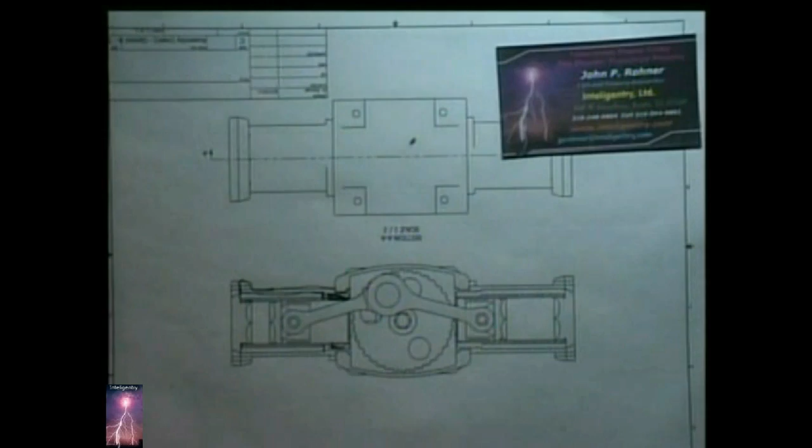Okay. Now, in 1982 - I go through the history of the Papp engine, but just between you, me, and the wall, it's really boring, and it's all convoluted with strange people and other people that have scammed and all kinds of shit. So it's really not worth the conversation.

In 2007, I designed the controller that was programmed by my brother and his technician, which made Papp's 1982 engine run. We've got video of that engine running. That's the same engine that got certified at the University of Western Oklahoma.

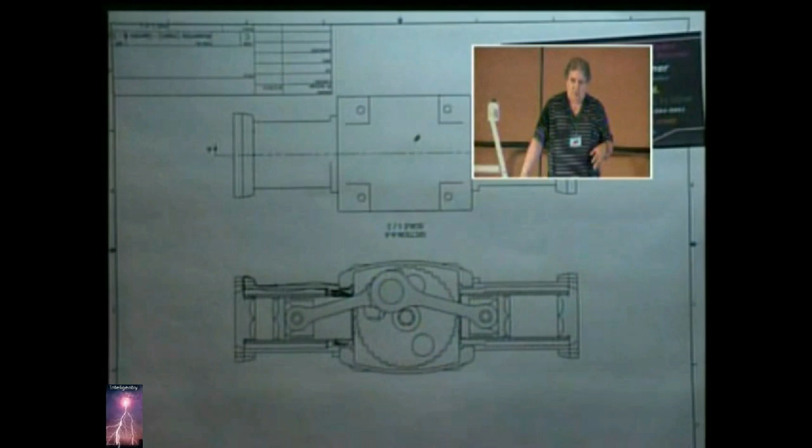Now, that's nice, but just between you and I, it doesn't mean anything, because this engine ran, then they sent it down to Oklahoma, and the professors at Oklahoma couldn't get it started until Joe Papp flew to Oklahoma and made it run for them.

And in my view, I've spent my life developing new products for companies. New products for companies mean that you have to have something you can replicate and the company can sell and make money. And in my view, the simple fact that Papp had to go to Oklahoma to make the engine run means that it was not that. It was not something that anyone could make.

As a matter of fact, in the last 30 years, that particular engine and any copies of it still haven't run. So that gives you some idea what can happen if you see something that's just simply a test and a one-man, one-off thing. And of course, we are trying to make sure we don't do that.

When I discovered the process of how this engine worked, I actually had some of my friends check it, and it was kind of funny because I sent these things to my friends in the nuclear business, and they sent me back a letter saying, oh, look, don't play with the Papp thing, it's a scam. But I sent them back letters saying, look, okay, I think this is how it works. Can you look at it?

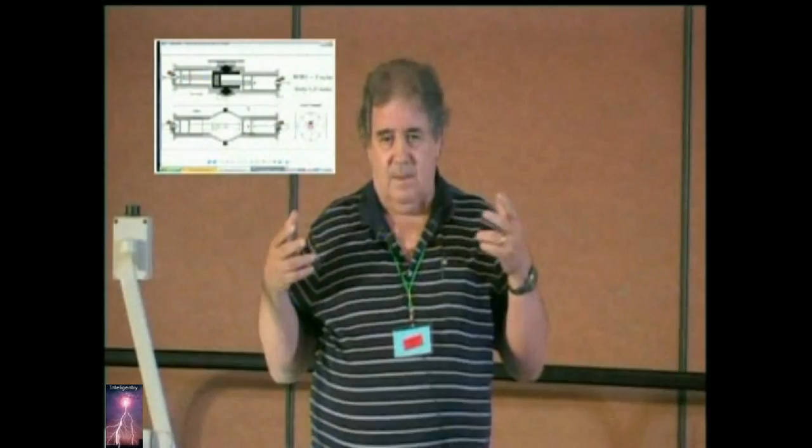Well, basically we do the same thing. The pressure in the cylinder, or in the closed chamber itself, is one atmosphere, and that particular gas now is static at that point. What we do is we ionize or invigorate the gas up to a point where it wants to be something else, in this case a plasma. And then we apply the key element, which is an activation, a ball lightning kind of activation, which then creates or coerces the gas to change from a gas to a plasma. And that expands, fills up the chamber, and the piston moves, just like the steam engine did. And then once it gets to a certain point, we turn it off, and it collapses, just like the steam engine does when the steam turns back into water.

Now, that's the easiest possible way to understand how this works. It's simply an expansion. We're all used to our internal combustion engines, and internal combustion engines work off of an explosion.

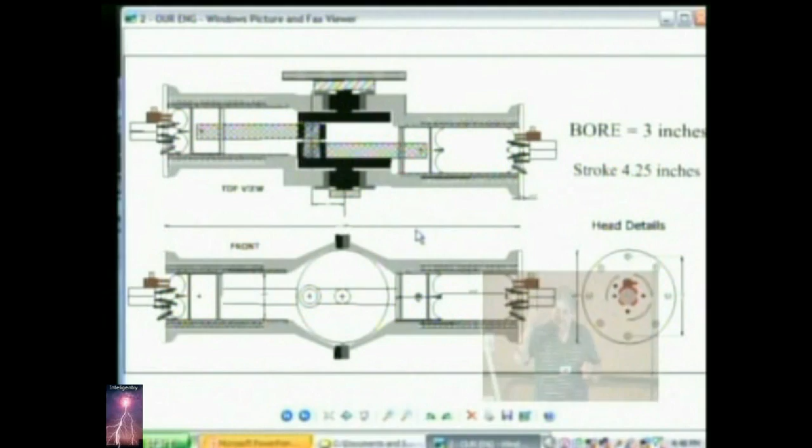That means that when the spark plug goes off, there's an explosion that releases a lot of energy for a very short time, which drives the piston down, and the remainder of the cycle is handled by kinetic energy stored in the flywheel.

Well, in this case, it's like blowing up a balloon and letting the air out. This works by way of expansion. There's no explosion in this cylinder, simply an expansion.

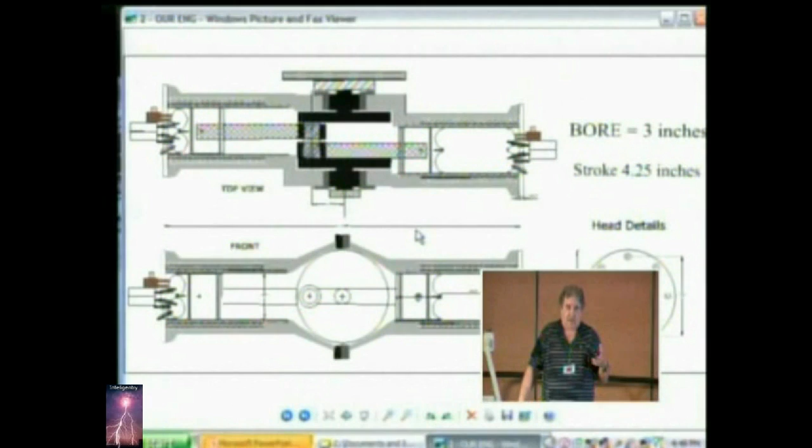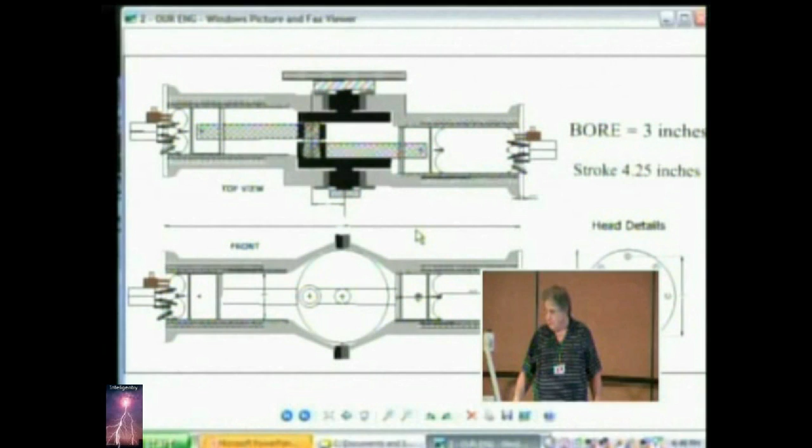We control all of that by way of electronics that handle how it functions. Now, that gives you an idea of what our engines pretty much look like, although this is a real drawing of it here.

Do I have to push? Can you push that? I'll get into that here in a sec.

This controller doesn't handle this, it only handles... anyway, this is a 2D drawing of what we're actually in the process of manufacturing right now.

Right this second, we are creating 5 what we call training engines. These are 5 engines being manufactured using numerical control techniques, not hand machined, but production machined. These engines will be used in our training courses as we license the technology to others, or as Plasmerg licenses the technology to others.

This particular engine is interesting from the standpoint that it will be mass produced. And once we get the first of these training engines operational, that's the last time we'll be asking anybody for a dime, because then we'll be able to license it.

The control system is really much more complex than the hardware. The hardware is really quite simple.

Now, in order to actuate a gas and convert it over to a plasma, it takes about 140,000 volts of electricity in order to fuse 2 atoms of helium. Now, the gas mixture in this engine is pretty simple: it's helium, neon, xenon, krypton. What did I miss? Okay, argon, I'm sorry.

Anyway, it's a pretty simple mixture, and quite honestly, the 100 cc cylinder of the engine, and this particular mixture does a 5-to-1 expansion. That means that starting with 100 cc's, when you convert it to a plasma, it creates 500 cc's.

And you don't have to pulse it, you don't have to do anything with it. All you have to do is set up the ionization factors and start it. It will complete that function on its own, until you take off the ionization and the control functions that create that, at which time it will immediately decay.

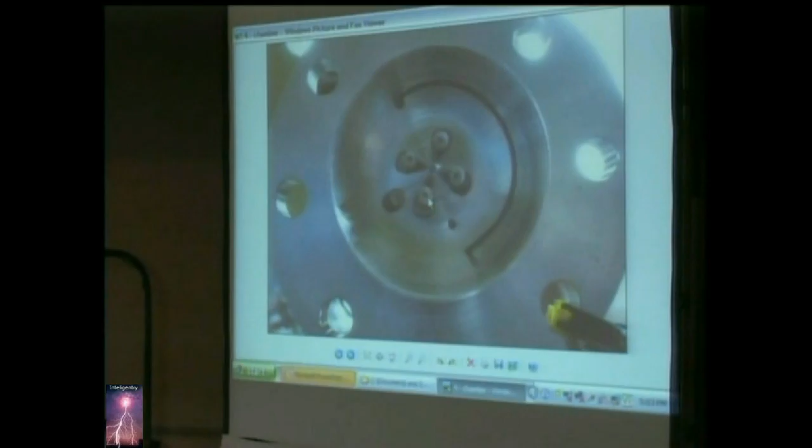In the system now, you've got four electrodes sitting here, and that center one is a strontium bar. The reason the strontium bar sits there is that it has an impedance slightly above the ground. So what happens is we feed 107 kV into each one of these, and it jumps over to that strontium bar, and because of the strontium bar's impedance and the fact that it's flat, it creates a little ball of lightning right on the end.

And it creates a ball at 400,000 volts. Remember I said it takes at least 150,000 to get a fusion, and the fusion is the key to the access. So that's what you're seeing there.

To give you some idea, this is the real head. This one has been used. You can see here, there's the four electrodes.

This is the radio frequency injection. We probably didn't talk about that, but in order to ionize the gas, we use electromagnetics to squeeze it, and then we add a radio frequency to just jiggle the hell out of it. I suppose that's as good a way to talk about it as any, because it really doesn't do anything except make them all get weird.

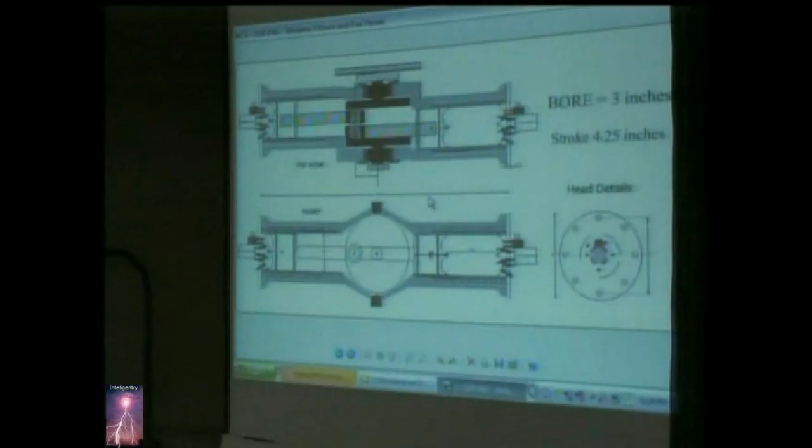Are you up for questions? When it comes time for questions and answers, I was going to do the usual protocol, but I'm down to five minutes. Whenever you're ready to start taking questions, our moderator will hold the mic so people can come up. There's a lot we've changed with this technology, it's hard to explain unless you're looking at it directly. The videos I brought don't seem to fit this player. We have that one, do you want it? Go ahead and put it up.

All of our mechanical engineering on this engine is being done by a product called Inventor, a 3D drafting process for mechanical engineering. It's the most impressive thing I've ever been around, because you don't have to go to a machine shop to make parts. You can build the whole engine, put it together, run it, and see if anything conflicts, then kick back and watch it go. Then you use a 3D printer, another very interesting thing, to crank out the parts so you can have them cast. It's really nice the way the world is now.

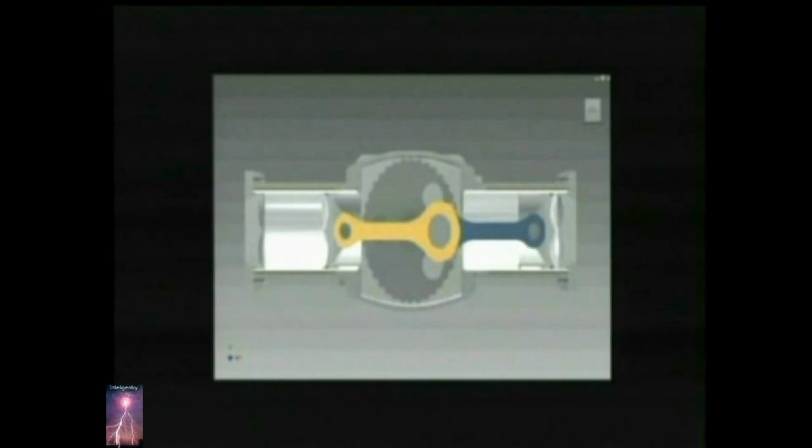You're hot up on the screen. This is an animation done from our 3D process. The jagged edges you see are actually 36 teeth that run under a sensor, with the 36th tooth missing. From that, we generate a signal sent back to the master processor, so it knows where it is in the rotation, to within half a degree.

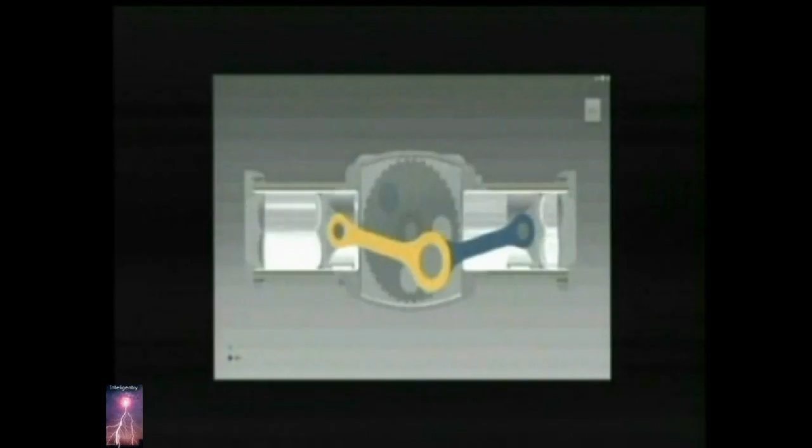My name is Harvey Fiala. I'm a graduate engineer from Caltech, and I've been coming to these conferences for ten or more years. The title of your talk, Understanding Plasmic Transition Process, didn't give us a clue it was about the Papp noble gas engine. There's an article in Tesla Tech journal from maybe five or ten years ago that mentioned an engine no one understood yet, one that was demonstrated in LA and exploded. I'm guessing you finally understand it now.

The process the Papp engine uses creates a plasma, and the plasma reverts back to a gas. That's as close as we get. The rest of what Papp said about it, in his patents and even publicly, was basically hooey. He did a great job telling people the gas was magic, which held people up for 30 years, and he did a great job explaining things in ways that didn't make good sense even to scientists at the time. I think Feynman was dead wrong, the scientific mind shouldn't look at something new with a closed mind, but he did. I'm not saying what Papp did was right or wrong. Had he done it any other way, we wouldn't be here today using this engine. It's a shame no one understood it, but finally some people took that basic process, figured it out, and are exploiting it now.